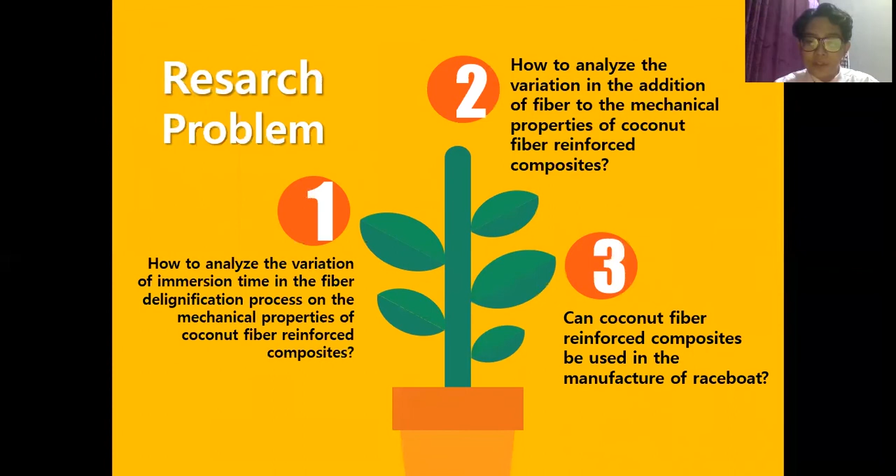The research problems in this research are: first, how to analyze the variation of immersion time in the fiber delignification process on the mechanical properties of coconut fiber reinforced composite. The second is how to analyze the variation in the addition of fiber on the mechanical properties of coconut fiber reinforced composite. And number three, can coconut fiber reinforced composite be used in the manufacture of raceboat?

Okay, these are the research objectives. First is knowing the analysis of the variation of immersion time in the delignification process on the mechanical properties of coconut fiber reinforced composite. Number two is knowing the analysis of variation in the addition of fiber on the mechanical properties of coconut fiber reinforced composite. Number three is knowing whether coconut fiber reinforced composite can or cannot be used in the manufacture of raceboat.

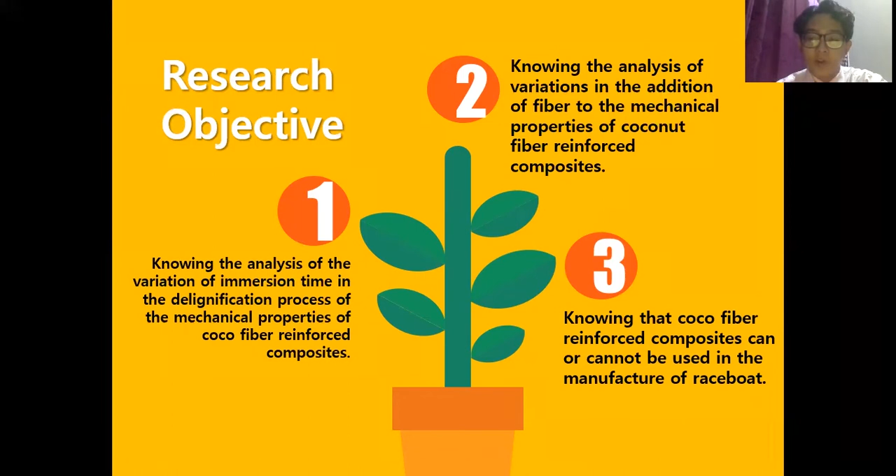Research significance. The first is to add value to the benefits of plantation waste. The second is as an effort to develop environmentally friendly material technology based on natural fiber composite. Number three is knowing the process of making composite.

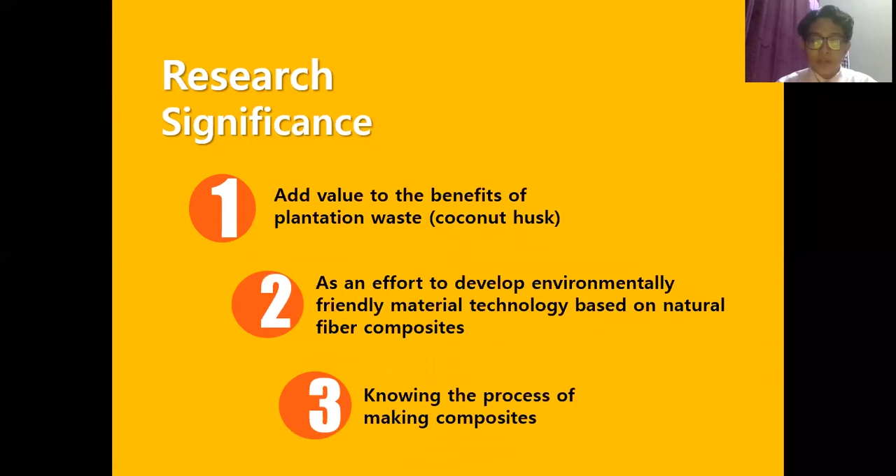This is a research delimitation. The first is the coco fiber used is taken from Lumajang coconut plantation. Second, the type of matrix used is Yukalac 157 BQTN EX. And number three, mechanical testing is a tensile test.

Number four, delignification was carried out using the alkali method with NaOH 5% for 0, 45, and 90 minutes. Number five, the percentage of fiber added is 20, 30, and 40%. Number six, the orientation of the fibers used is continuous.

Seven, the fiber used is 25 centimeter long continuous fiber, considered homogeneous with 1 millimeter diameter. Number eight, the composite manufacturing technique used is hand layup. And the last, specimens are according to ASTM D3039.

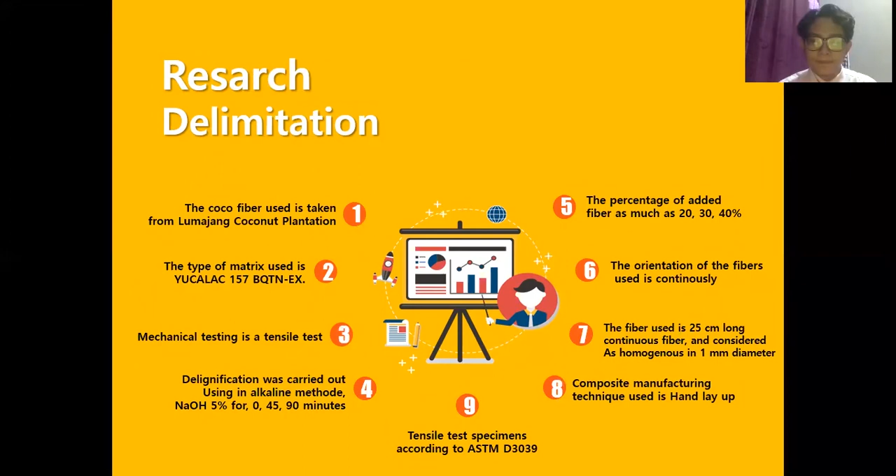Okay, next is chapter number 2. There is a review of related literature. In this chapter, I'm going to explain the theory that I'm studying from literature. First, there is a composite. Composite is a new type of material, a combination of two or more materials, where the mechanical properties of the constituent materials are different. One is the material as a filler, and the other as a reinforcing phase.

And the second, there is delignification. Delignification or alkali treatment of fiber is a process of removing impurities or less effective fiber constituent components such as lignin, hemicellulose, or pectin. Reducing the less effective components will increase the interfacial strength and increase the surface roughness, which will result in better interlocking.

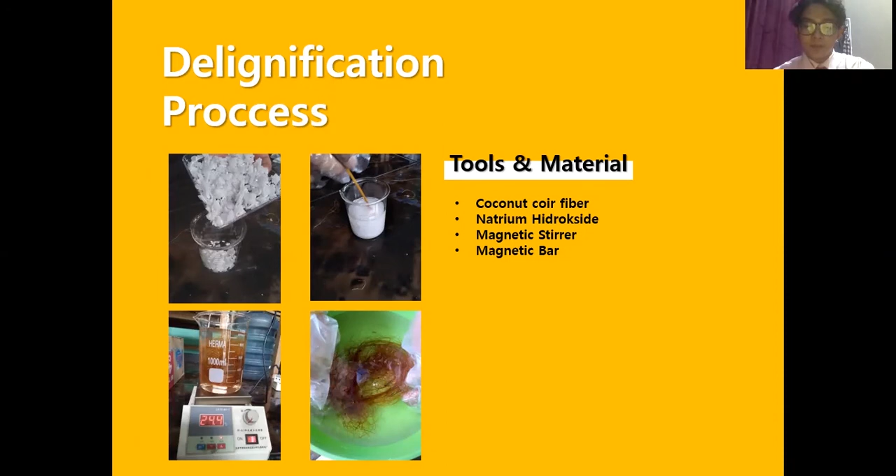And then validation of reducing lignin levels by the FTIR method. FTIR, or Fourier transform infrared, uses samples of coconut fiber that has been powdered, with delignification and without delignification. In this test, a tool is used to determine the compound. In analyzing the FTIR results, we need to look at the spectrum produced in order to determine the type of compound functional group at the specific peak.

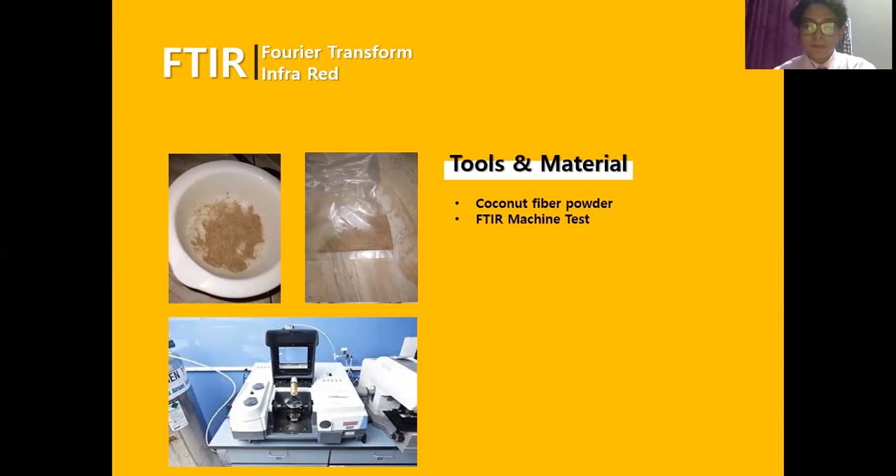Next is specimen fabrication. In this process, first prepare the resin and fiber that have been measured as needed. Remove the fiber bonds that have been tied with rubber. Then arrange them on the specimen mold. Slowly pour the resin. Then roll it on the surface of the fiber and resin so that it's evenly distributed. Finally, clamp the mold with iron.

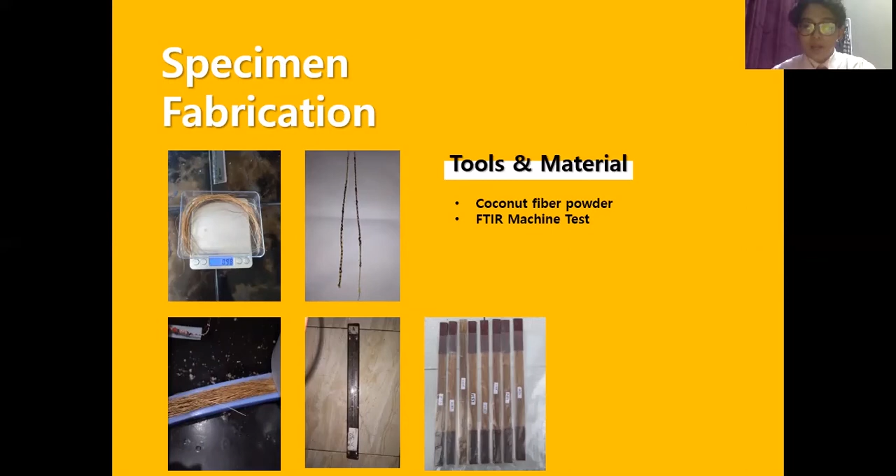Next process is tensile test. Testing is carried out using a universal testing machine. The capacity of the machine is 10 kilonewton and the standard of testing is the ASTM D3039 standard.

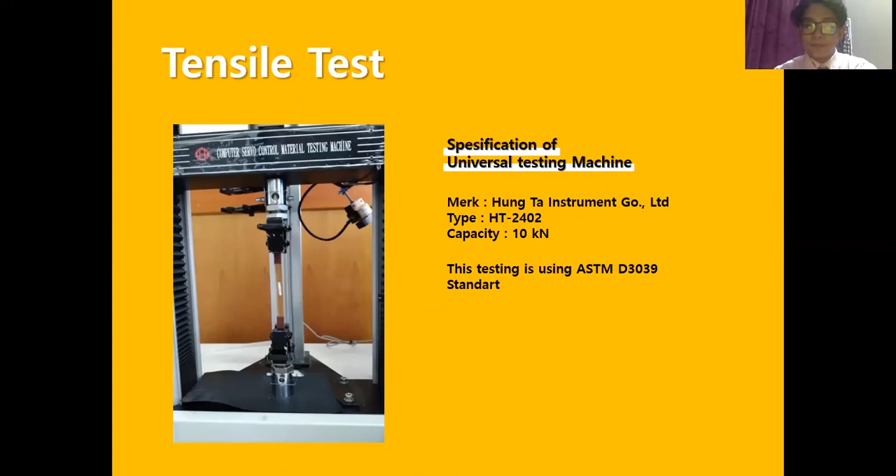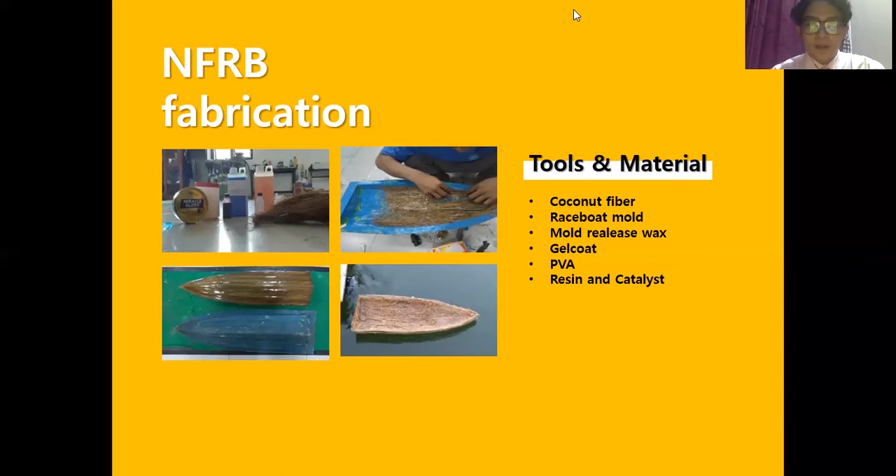Next is NFRB fabrication, or natural fiber reinforced boat. After the tests were carried out, the composite with the best result was obtained. Then the process of making the NFRB is carried out. Okay, the next is chapter 4, result and discussion.

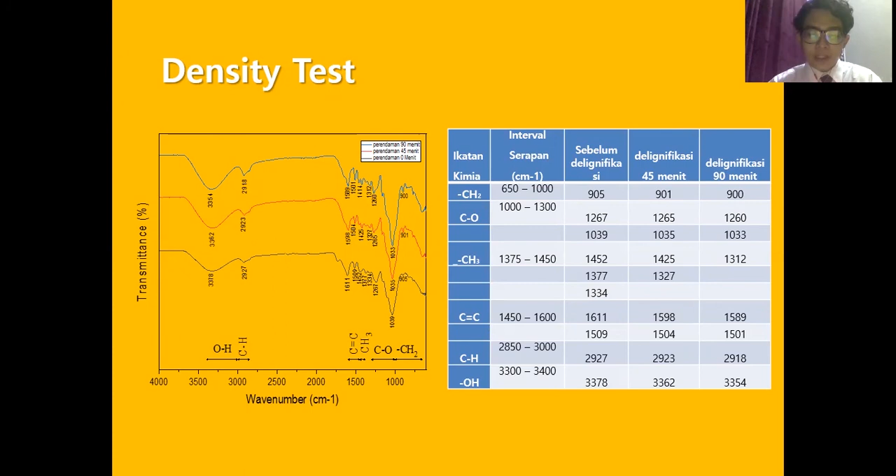Next, this table shows the peaks of the FTIR result graph. In the fiber before the treatment, there is a peak at wave number 1611. The peak indicates the C=C functional group, which indicates non-cellulose or lignin compounds. In the fiber after treatment, the C=C functional group content decreases. So the treatment process does not completely remove lignin but only reduces the lignin.

Next, there is tensile strength. At 45 minutes of immersion, the coconut fiber composite had the highest tensile strength compared to 90 minutes and 0 minutes of immersion. This is because the longer the fiber is soaked, the fiber core would be damaged, while the lowest tensile strength was obtained at 0 minutes of immersion. The treatment process also makes the fiber surface rough, making it easier for the fiber and resin to bond.

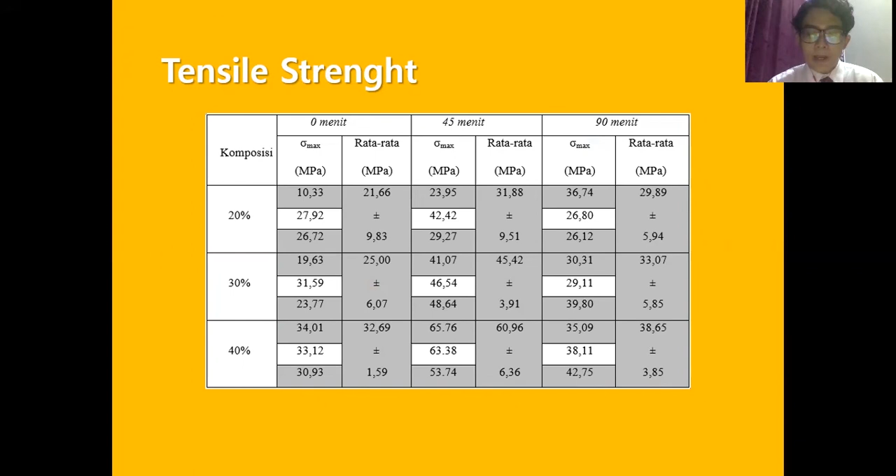At 0 minutes of immersion it is the same as not soaked, which makes the fiber unable to bond with the resin. At the 40% fiber composition at each immersion, the composite has the highest tensile strength. This is because the more reinforcement, the more the tensile strength will increase, because the fiber as reinforcement is the main part in holding the load. All right, this is a chart of tensile strengths for all variants in this research.

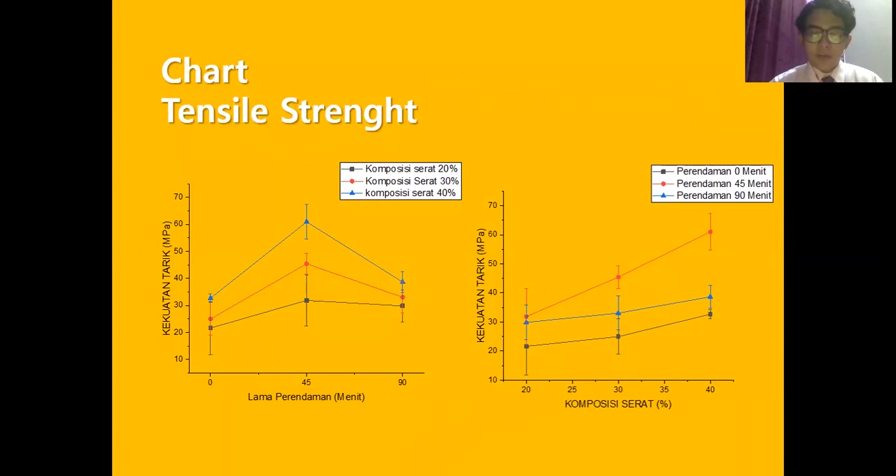Next, this is the result of ANOVA. On the composition and orientation variables, the p-value is smaller than alpha, and F count is greater than F table. So in the ANOVA result, there is a rejection of H0 in both independent variables. So it can be concluded that the immersion time and composition affect the tensile strength. Okay, in the fabrication of the NFRB, the variables used are 45 minutes of soaking the fiber, and a fiber composition of 40%.

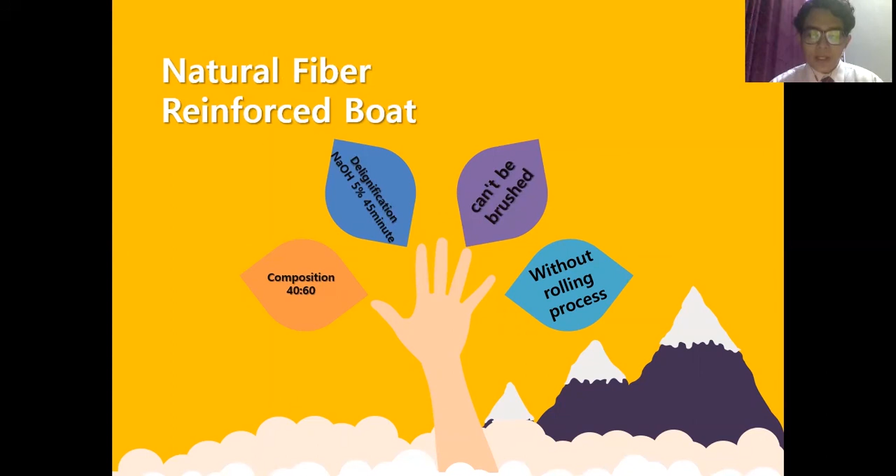Some obstacles in NFRB fabrication are that when the resin is applied, it cannot be brushed, and after that, it cannot be rolled, because it will damage the arrangement of the fibers. Arranging the fibers hampers the production process because the coconut fibers are curved and irregular. Following this is the NFRB when tested in the water.

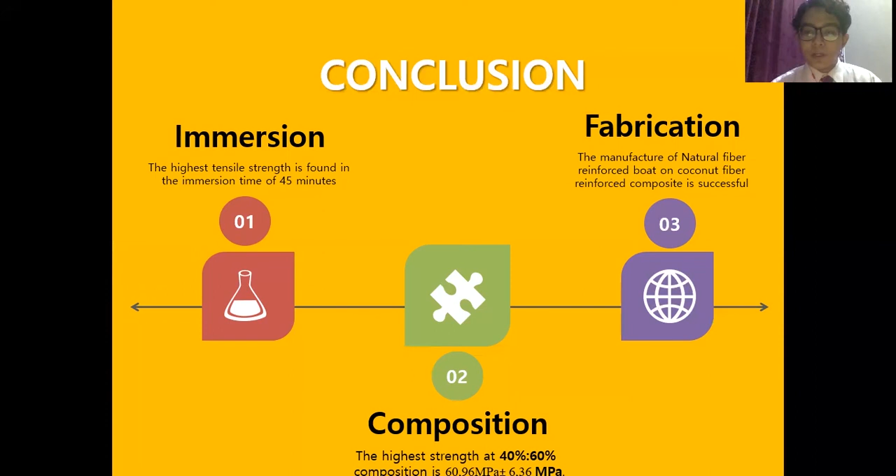Okay. The last chapter is chapter 5, conclusion and suggestion. The conclusions of this research are: first, immersion. The highest tensile strength is found at the immersion time of 45 minutes. Composition: the highest strength is at 40% fiber and 60% matrix composition, 60.96 MPa with a deviation of 6.36 MPa. And the last is fabrication. The manufacture of the natural fiber reinforced boat, the coconut fiber reinforced composite, is successful.

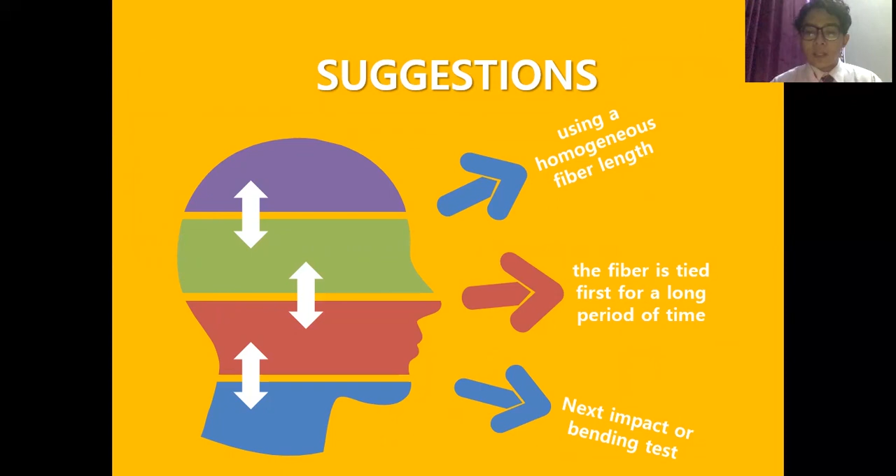Suggestions. First, use a homogeneous fiber length. Second, the fiber is tied first for a long period of time. And for next testing, maybe use impact or bending testing.